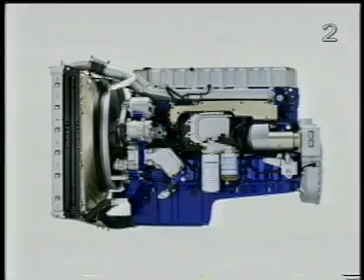The following section deals with technology. Let's take a closer look at the engines in the FH series, as well as the gearboxes equipped with the range and splitter functions.

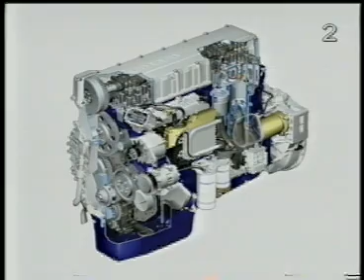The Volvo FH engines feature an overhead camshaft and 4 valves per cylinder, as well as a fuel system in which the injection pump has been replaced by a unit injector for each individual cylinder. This design promotes low exhaust emissions and low fuel consumption.

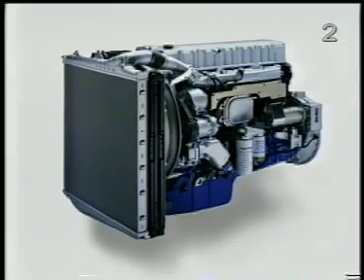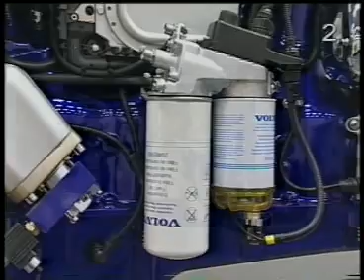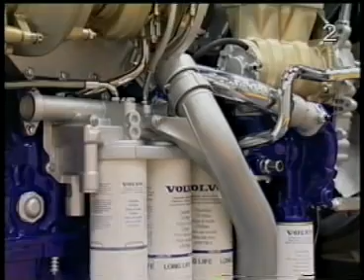On the engine's left side is the fuel system with the feed pump, control unit and fuel filter. On the engine's right side are the turbocharger, EPG, that is to say the exhaust brake, oil filter, bypass filter for the oil, and the coolant filter.

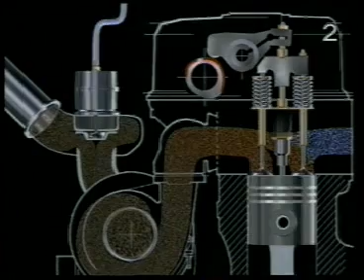The D12 engine can be specified with VEB, which stands for Volvo Engine Brake. VEB consists of the conventional EPG exhaust brake in combination with VCB, a special function in the valve mechanism known as the compression brake that further boosts engine braking effect.

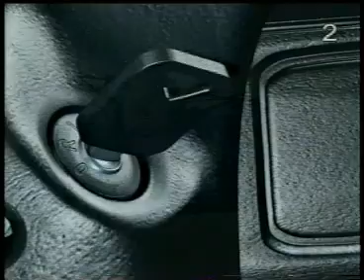The fuel system can be bled and the water separator drained using this switch. The engine should be switched off and the starter key should be in the radio setting before starting the bleeding process. If your truck is equipped with a mechanical gearbox, it functions as follows.

In our example, we will use a gearbox with both range and splitter functions. The gearbox base unit has 5 ratios, in addition to the splitter and range gears. All the gears apart from the reverse and crawler have synchromesh. On the gear lever, the gear positions are marked with R for reverse and C for crawler. The others are basic settings for moving forwards.

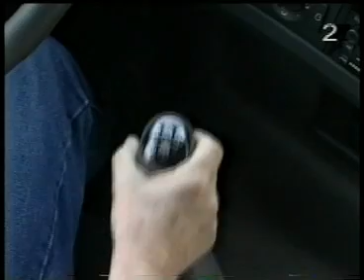The gearbox range unit has 2 sections, with changes between the two taking place via the range control on the gear lever. Downward gives the low speed area, while upward gives the high speed area. Changes between the two take place when the gear lever is in neutral or passes neutral. We will use the following sequences to show how to change gears. When the lever is in neutral and the range control is moved up and down, changes take place in the range section.

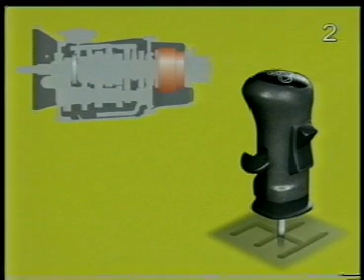In order for the range gear to have time to change, the range section should always be pre-selected before you change between the two. When starting, always pre-select low range and first gear as the highest gear. Depending on the road's gradient and the weight of the load currently being carried, it is sometimes possible to change from first gear to third and then on to fifth before sixth high is engaged.

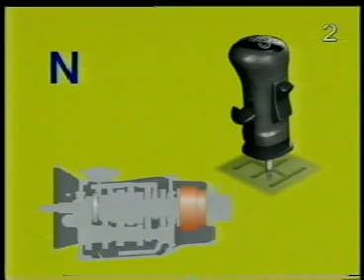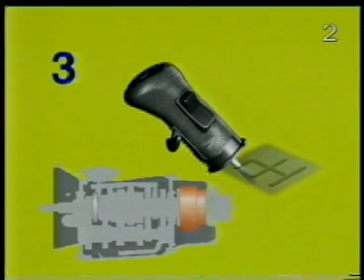In this sequence, we will start with first gear, then move to second gear, and then third. Select the high-speed section before changing to fourth gear. At the same time as the gear lever passes neutral, the range gear will shift from the low speed to the high-speed section.

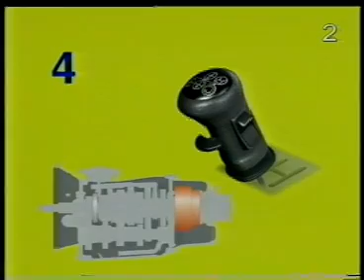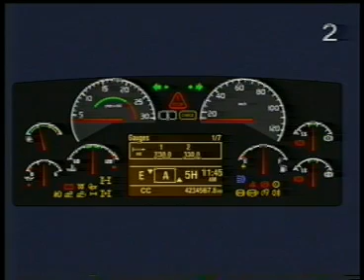The splitter gearbox has 2 ratios, low split and high split. The relevant ratio is selected with the splitter control. This control divides the base gearbox ratios into low split and high split gears. This means that in combination with the range change system, the gearbox offers a total of 14 forward ratios. In the instrument panel, there is a symbol that indicates when low split is engaged.

Split changes may be required in the high-speed section and on steep slopes, or when hauling very heavy loads. The following sequences show how to change gears with the splitter gear system. Changing between high split and low split takes place when the clutch pedal is floored and released.

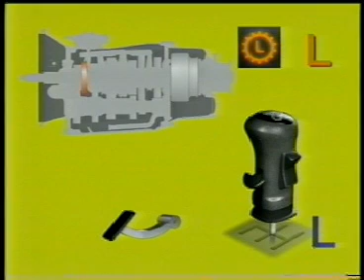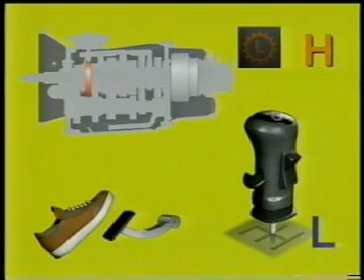Begin by selecting high split. Press and release the clutch pedal. When the change is completed, the indicator symbol disappears. Change to low split in the same way. When this process is completed, the indicator symbol lights up.